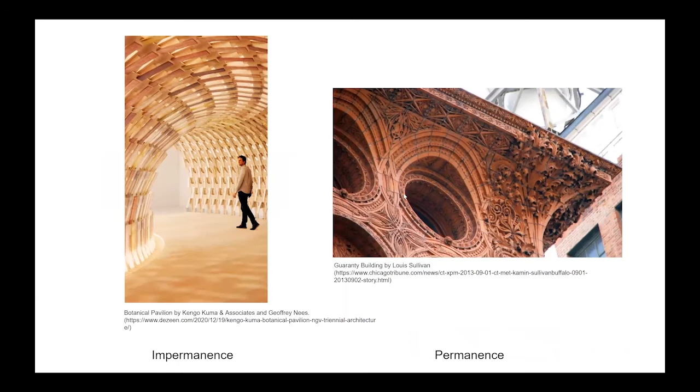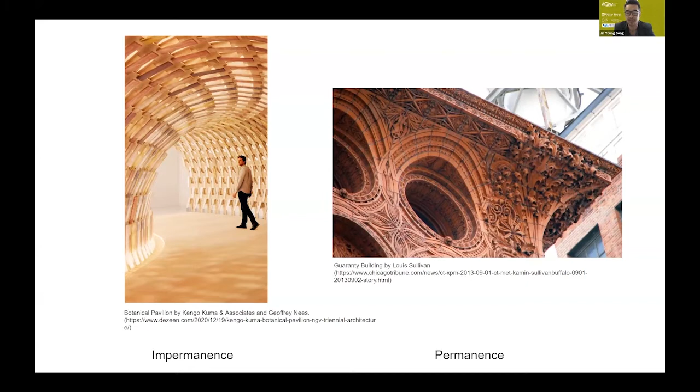I think based on these diverse backgrounds and perspectives on the material, this allowed us an opportunity to rethink the fundamental property of terracotta, which is fantastic for longevity and permanent use. On the other hand, we also acknowledge the shorter program life in contemporary market dynamics, and temporary structures, what we call pavilions, and more ephemeral urban space making happening in many places. So we question ourselves: can terracotta respond to these two different timescales?

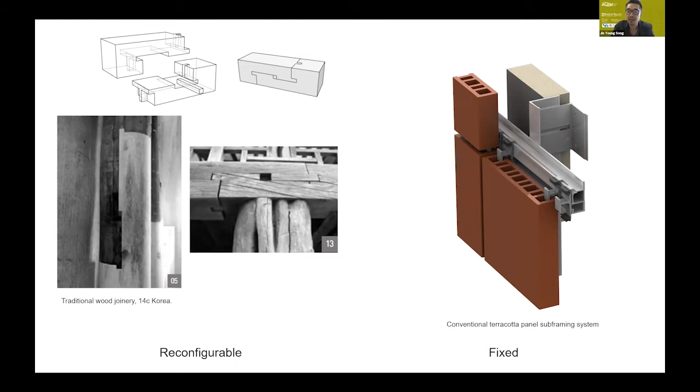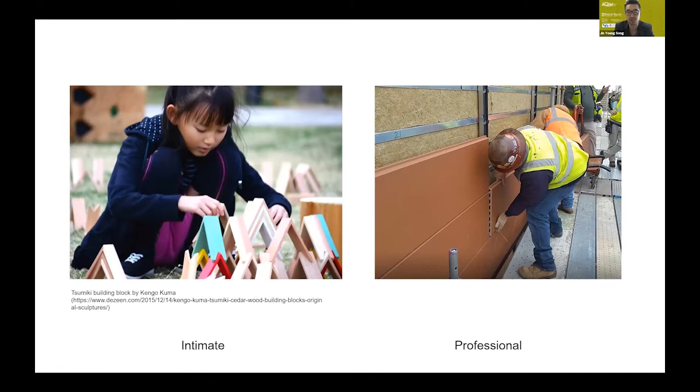If that's possible, we may change or contribute a bit to the perception of this material, from professional assembly for skilled labor to more intimate use for everyone.

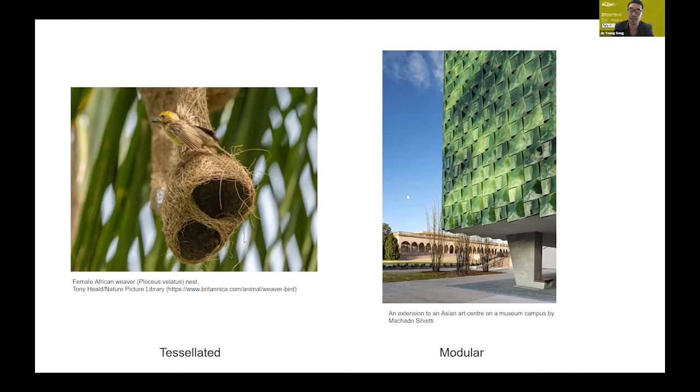And if we try to make a novel mechanism for the system of aggregation, we can also try a certain level of geometric freedom, so that beyond the modular and repetitive nature of terracotta panel assembly, we can try to make a bit of organic growth using the unique stacking mechanism.

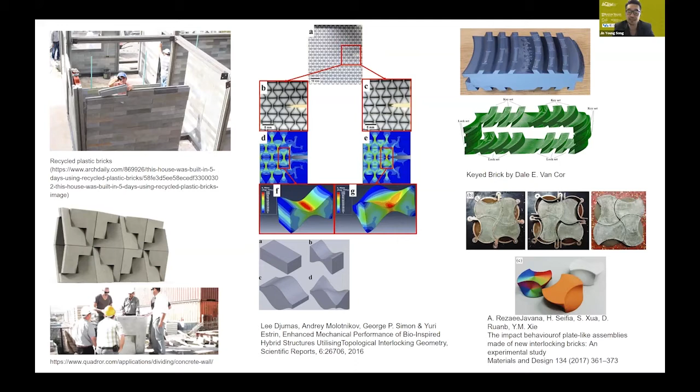For this concern, we know there is previous research about dry stacking, and we learned a lot from how the block design itself can be evolved to make a more performative aggregation system, so our team is capable of doing this research.

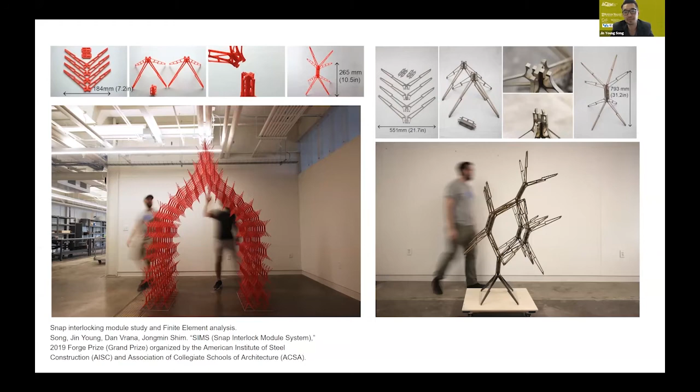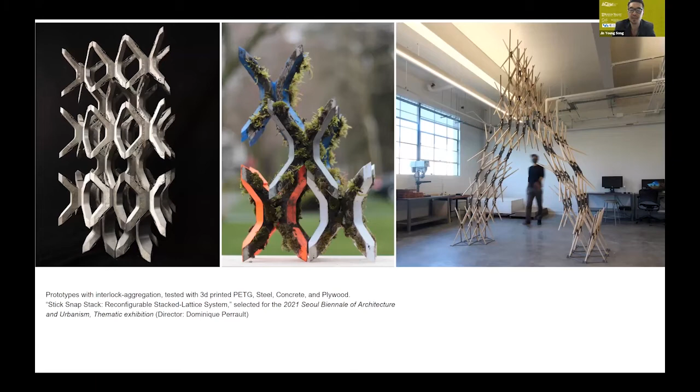We have been interested in this topic. These works are from our team, where we innovate the block design, and it can aggregate in different ways using plastic, wood, concrete, and steel, and so on, all based on a unique interlock mechanism, and everything can be disassembled pretty easily.

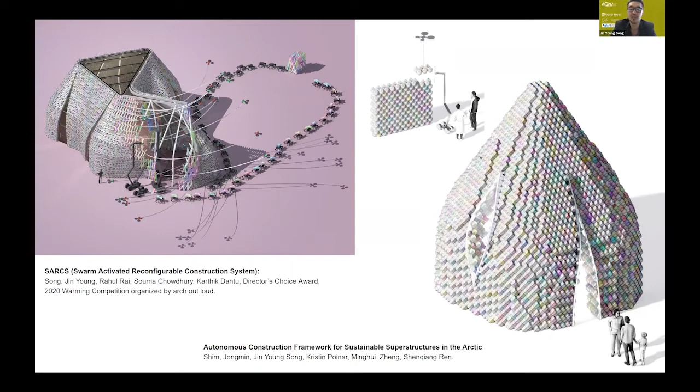We're particularly interested in this system of aggregation because we think future manufacturing and construction systems will integrate with the development of robots and swarm robotics. Construction sites have too many heterogeneous tasks, so in terms of machine learning and robot development, we can easily use the simplicity of stacking, so that robots can stack based on simple actions. How we innovate and develop the stacking mechanism will be very useful for imagining our future construction.

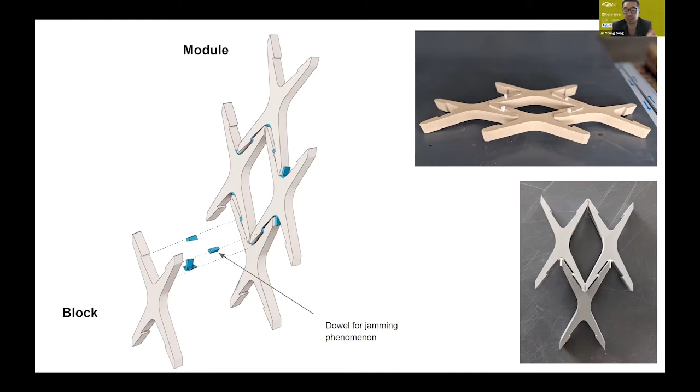Based on this motivation, we designed a unique block. This block has a bit of unique geometry, allowing the jamming phenomenon by dowels. Four blocks make one module, so when the top and bottom blocks hold two middle blocks, it completes as one structural module by the jamming phenomenon. Once that module is completed, it can be repeated to be aggregated into any shape.

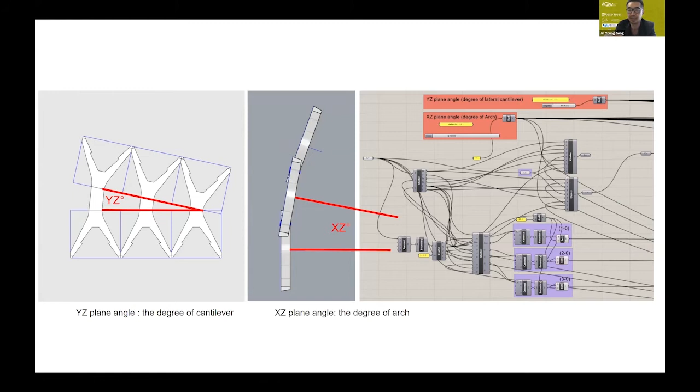Of course, we can do easy simulation. In this case, controlling two different angles based on the 3D printed dowels or dowel geometry can allow angle changes, or the block itself can allow that angle change. Based on this control, we can limit the number of modules but still achieve a certain desired overall form.

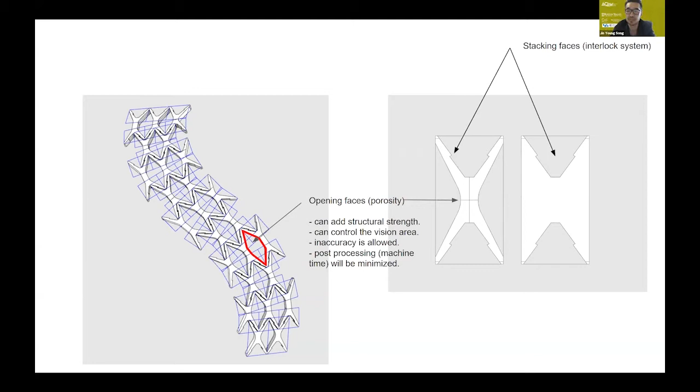At this point, the block design: top side and bottom side is the stacking faces, which needs complete accuracy for the accurate jamming phenomenon. On the other hand, the right and left side is open, as after the firing process the inaccuracy is okay. It's only for controlling the porosity of the overall stacking system, so we can simulate how the limited module can evolve into different geometries through digital simulation.

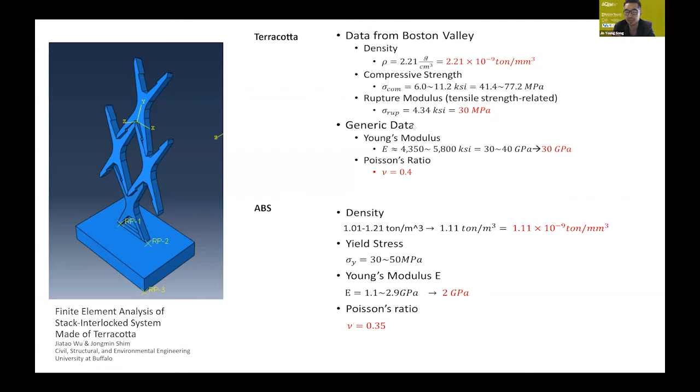In order to do this, we know that the brittleness of the material should be our friend, not the enemy, because we want to dance with this situation. We received generic data from Boston Valley and applied safety factors for our experiment. We focused on the rupture modulus, the point where brittleness happens, at 30 megapascal.

Our engineering team provided valuable information. Right before reaching the rupture point, we can apply about 60 kilogram force for this 4-block module. In other words, one block can hold about 130-pound weight coming from the top, including the weight of the blocks.

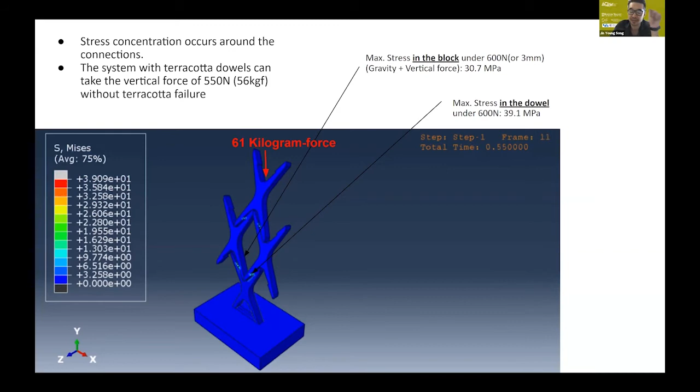What we learned, as expected, is that the most stressed area is the jamming area, but failure happens in the dowel first, then the area in the leg around the jamming area. That's the interesting learning: the leg flexure stress is not a problem, but the brittleness of the jamming is an issue for our block design.

So we tested with the ABS dowel, which represents plastic materiality. It's very hard but doesn't fail, with a minor, very small elasticity in the nature of the material. This functions to distribute the stress in the jamming area so it can take more load, increasing the load capacity by 30%.

Compared to the previous hard dowel, for example the terracotta dowel or steel dowel, which only makes 3 millimeter displacement over our 1 meter test module, if we use the plastic dowel it increases load capacity by 30%, but gives twice more displacement — 7 millimeters over 1 meter.

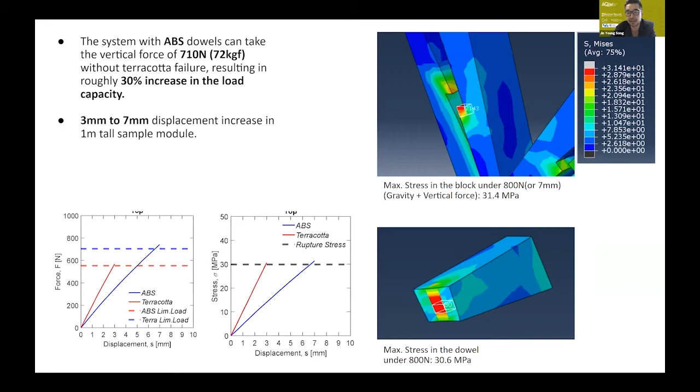That's a very promising study, because we can innovate the design of the jamming. Another test includes the gravity of the weight, and also pushing from the side, simulating a wind load or someone pushing from the side.

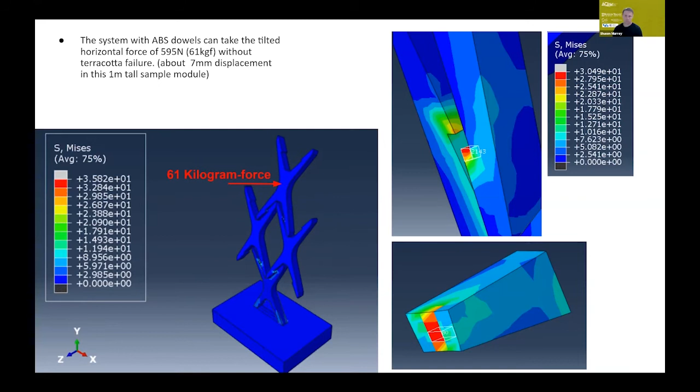We learned that the same amount of force, about 60 kilogram force, will reach the rupture point, so one block can hold about 30 blocks on top of it before failure. So we are very comfortable simulating this type of cantilevered arc using the terracotta blocks.

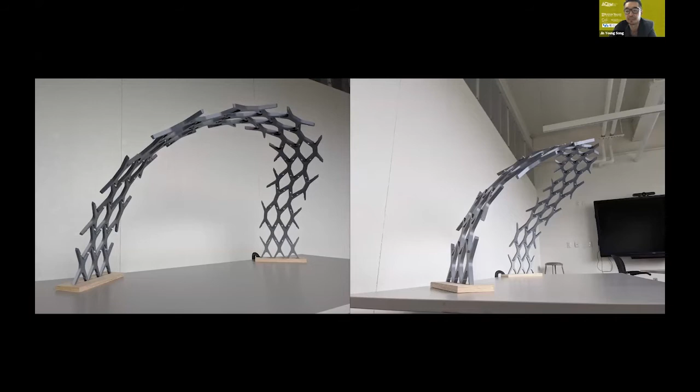For this case, we tested with just mock-up plastic blocks. For the terracotta fabrication, we decided to try this image on the left, just to proceed with the potential application for the building envelope and building facade simulation.

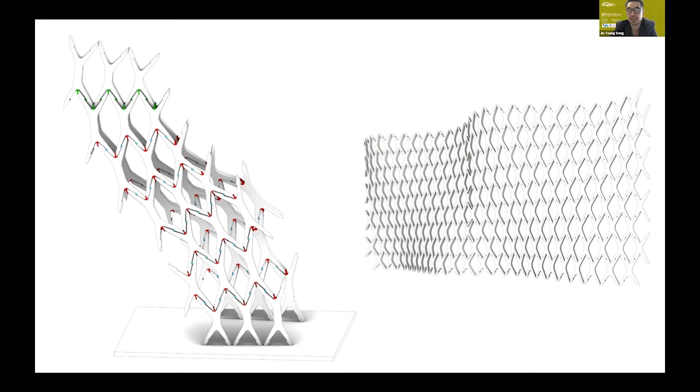So Shawn Murrey can continue the fabrication part. The fabrication is where our team bonded and learned the most through the project.

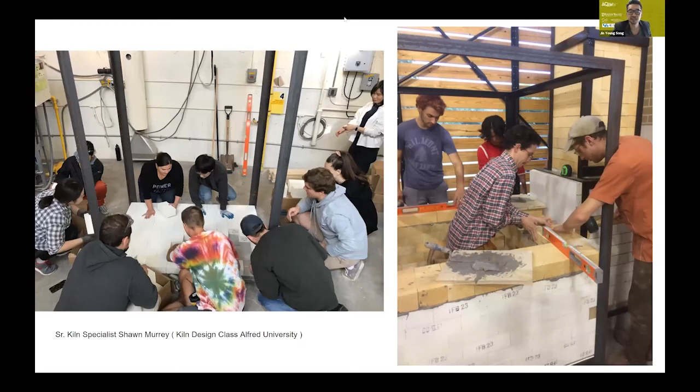The next 3 slides are a bit of background. The first one shows AU students building and designing kilns with me through a course. This slide is an example of some artwork and research that I'm doing in the studio.

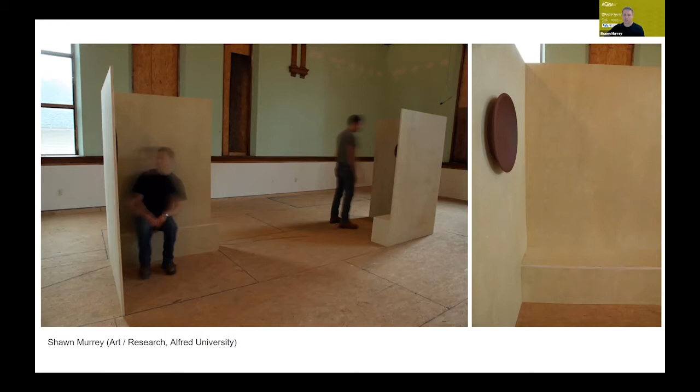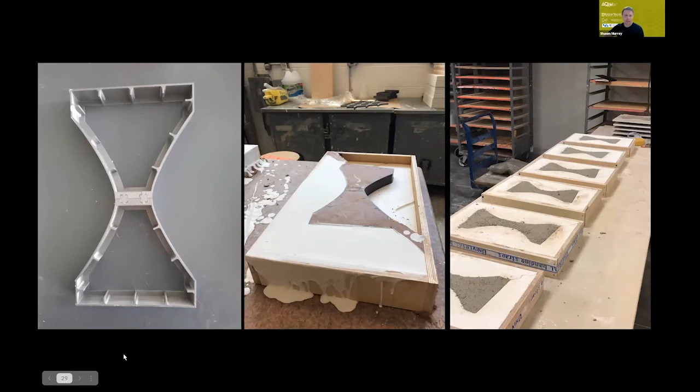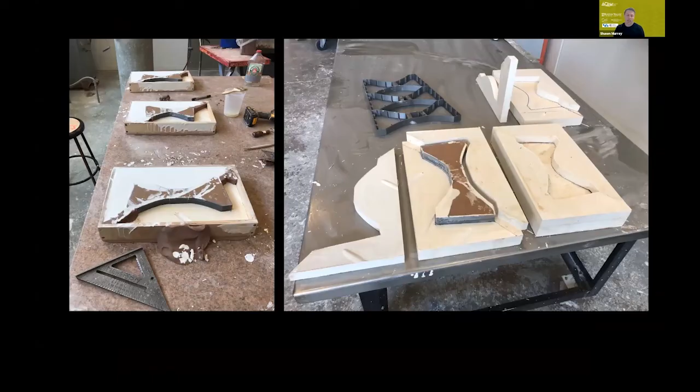So UB printed out our positive shapes of our X block unit, and we decided to use this solid hourglass shape. Essentially we filled in the space between the appendages of the X. In doing this, we decided it was important to try to get the unit to be as flat and as planar as possible through the drying and firing process.

Ideally, in the factory, we would be using a ram press application. The ram press would allow us to make the units very quickly, and it would also help with uniformity as far as compression with the materials. But at Alfred, we went with what we had available and what we knew.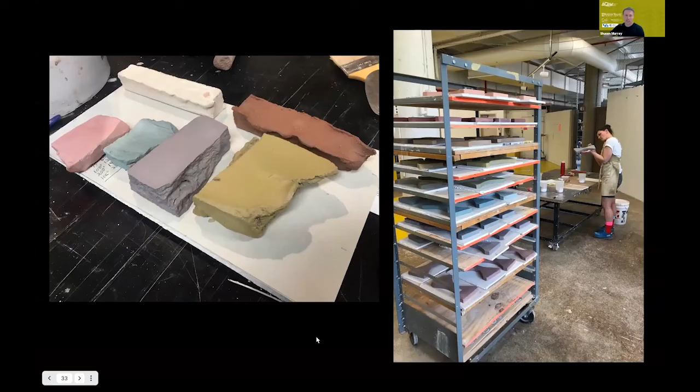We used a traditional terra sigillata surface, which is made of fine particles of clay. In liquid form, we added ceramic pigment and heavy metal oxides to create the palette, and in the end we had a really beautiful, silky matte clay surface.

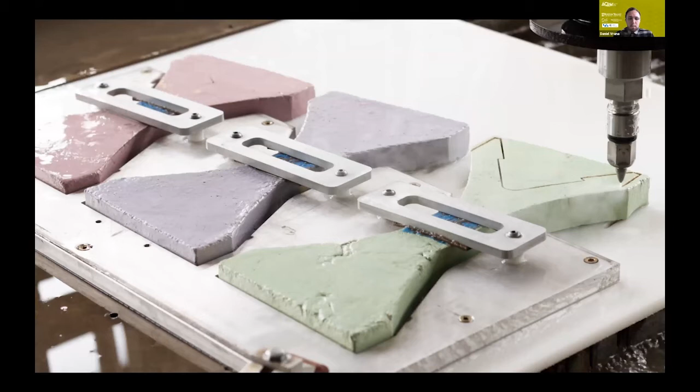So once the units came back to UB, we were working on trying to get back some of the tolerance and precision that's usually lost throughout the kiln firing. So what we ended up doing was taking these pieces to the water jet, and we didn't want to water jet out the entire piece because we were trying to keep some of the integrity of the original formed pieces that were done at Alfred.

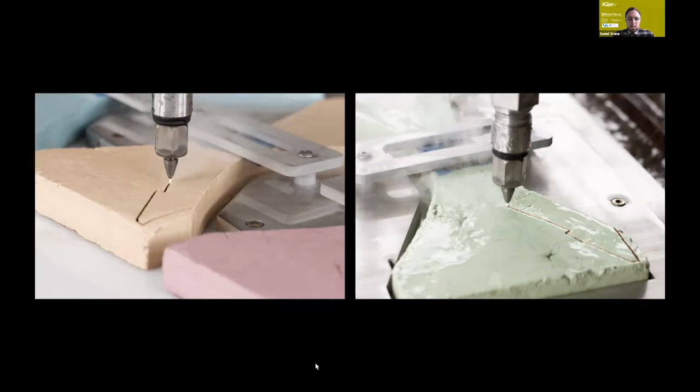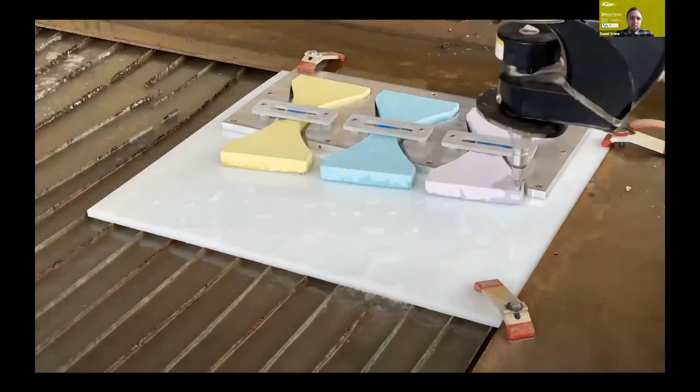But we also wanted to register the post machining through parts of the material that exposed the raw clay body, and then the sort of unglazed parts that were the post process parts. So we created a jig that allowed us to clamp in the small, medium, and large pieces into the water jet. You can see the machine spinning around. What that was doing was redistributing the kerf of the water jet out to the scrap parts of the material so that we could maintain a perfectly vertical edge through all of the pieces that we had.

And this was really important for the assembly process. We were working on both the top and the bottom of the units at the same time so that we made sure we had a precise relationship between the top legs and the bottom legs of each unit.

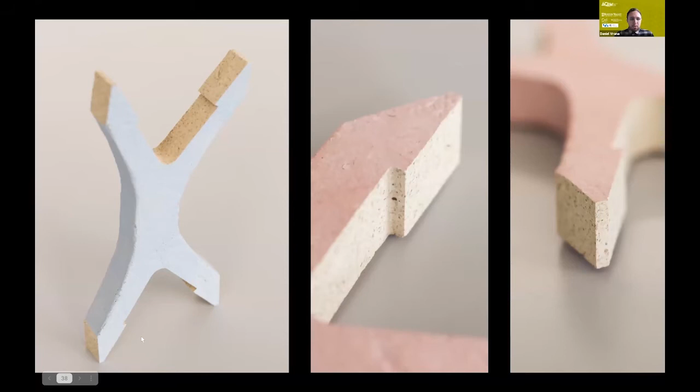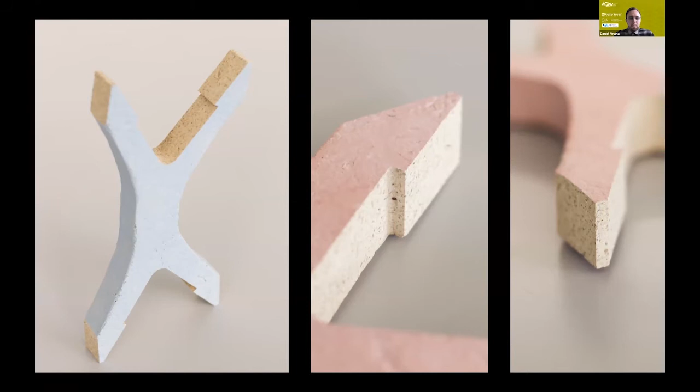So this slide shows how the final pieces came out. I think one thing that we were really, really happy with was how the water jet interacts with the glaze. So some of these pieces are shown from the front and some of them are shown from the back. And we were really interested in the sort of crisp edge that was able to be created between the glaze and the raw water jet cut edge.

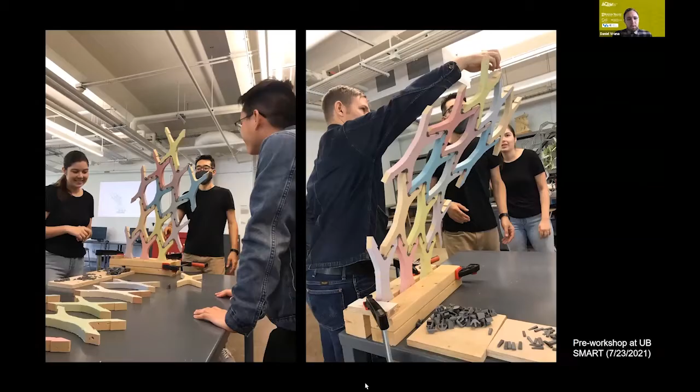I think one thing that we were really impressed with was the general rigidity of the overall structure and the ability to actually assemble that without any armature or scaffolding underneath.

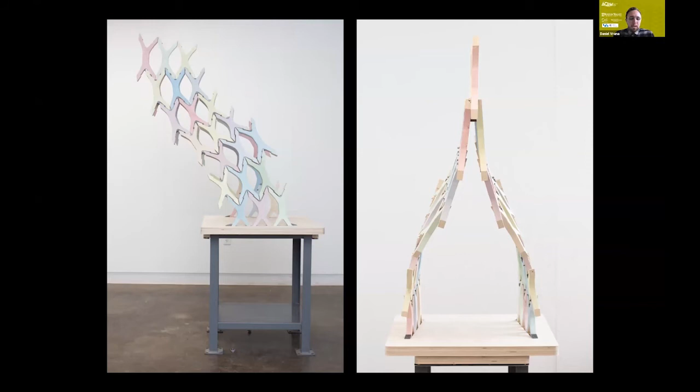And then the ABS plastic inserts allow us to control the growth direction of the piece, as well as the sequencing of the small, medium, and large pieces. So on the right image, you can see the sort of T-shaped insert pieces and then the dowels that sort of jam the pieces together. And then in the next slide, we'll get an even better view of those dowels. So you can see that the tight connection is created actually between terracotta and ABS plastic. This removes any terracotta to terracotta connection.

So moving forward, one thing that we're interested in was actually reducing the amount of pieces from 3 unique pieces to 1. So in this scenario, we actually only have 1 piece, and then all of the geometric changes and sort of flexibility in the system is created in those end inserts. And we're also working on removing the dowel from the middle to get rid of that structural connection and relying on gravity for the system instead.

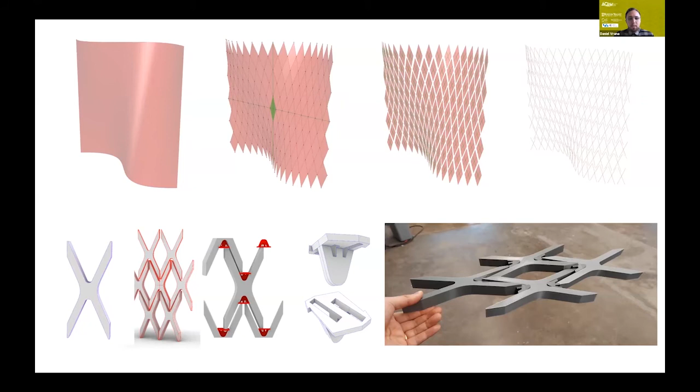And then another test that we're working on side by side with this is with Jonathan Hopp at Alfred. We're working on 3D printing the units.

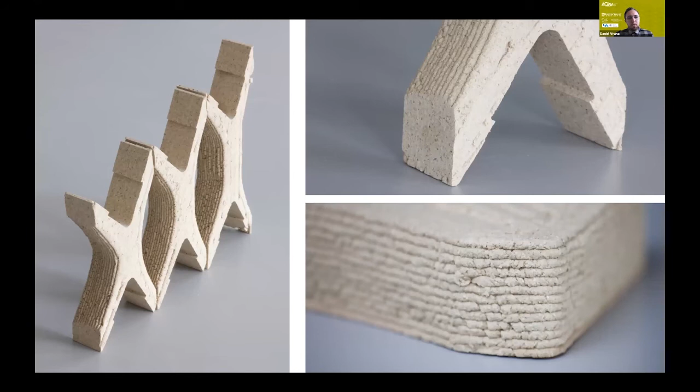We think there's a lot of potential here to customize the units further, reduce the amount of waste without the use of molds, and we can more closely approximate the units. We can potentially redistribute some of the material to work better with the water jet cut edges, while being able to remove material in areas that aren't being water jet cut, to expose more of that raw versus glazed scenario we're looking at. Here you can see the texture created by the 3D printing in contrast with the really smooth edge created by the water jet cutter.

So we are interested in the next step of this study, how we can utilize this reconfigurability. This is one example that can be used for a low-tech dynamic facade, so that it can be used for shading surfaces in the summer season to block heat gain, and then it can be reconfigured to the inside of the curtain wall, so that it functions as a kind of thermal mass, like a mobile thermal wall concept.

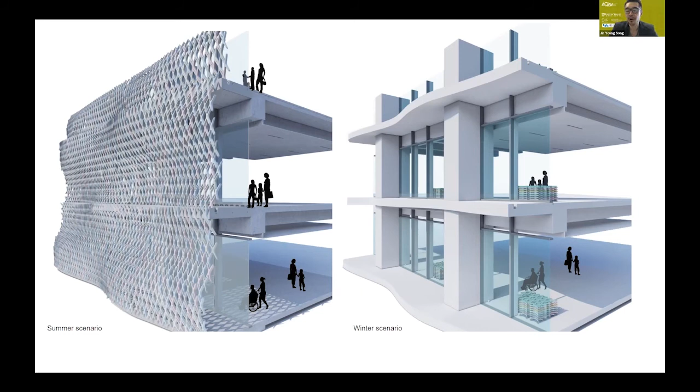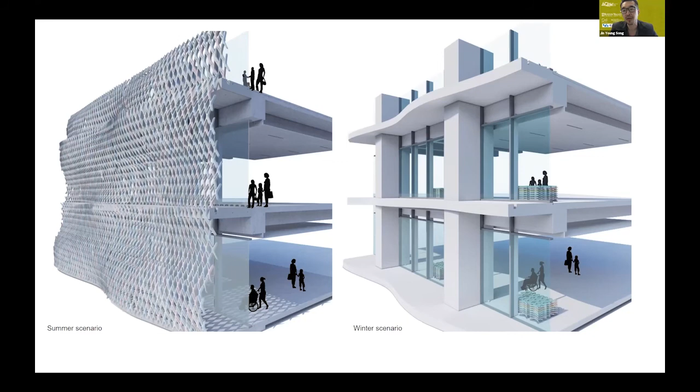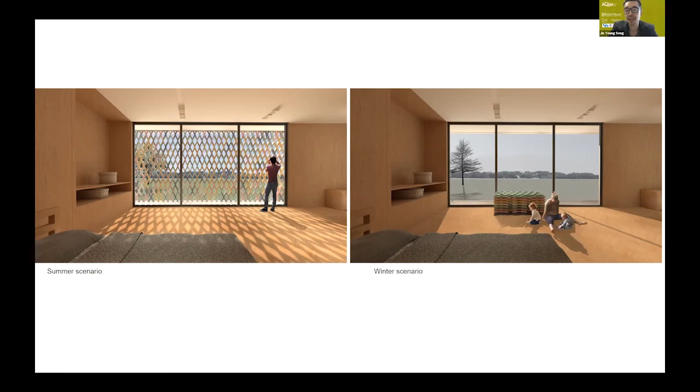Also, when it is reconfigured for the next season, because our blocks are organized in different ways, the overall pattern of colors will be different. This idea of mobile thermal mass can also be used for residences, just to increase energy performance. This is the study we're interested in, and we hope to develop and research it further to be presented in the future.